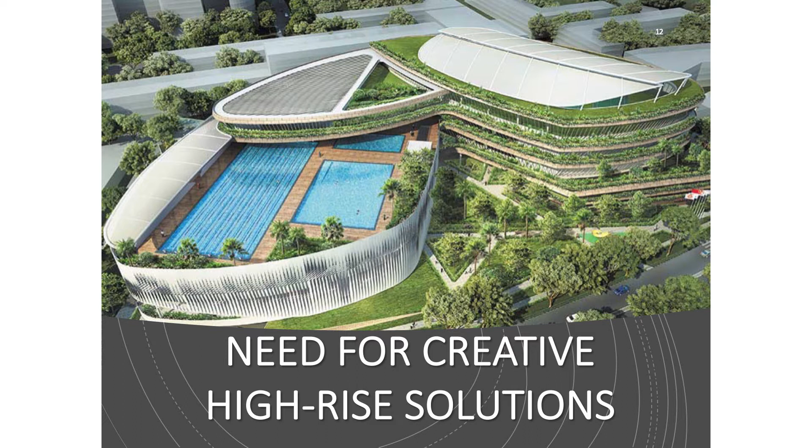Yet despite the land size, we have a population of about 5.6 million people. That population density translates to 20,000 persons per square mile, making us the second densest city in the world. So we have a need for creative high-rise solutions in where we work, live, and play, that also balances our land needs with preserving the natural environment.

A bit more about CPG Healthcare - this is the studio that I'm from. We have projects dating to the 1980s. Our mission is to design and deliver innovative, creative, and sustainable health-oriented developments. Our projects are quite diverse - we have a mix of public and private healthcare projects, medical academic projects, health promotion developments, and even wellness communities. We try to cover the broad spectrum of healthcare, targeting different phases of life, from primary care to palliative care.

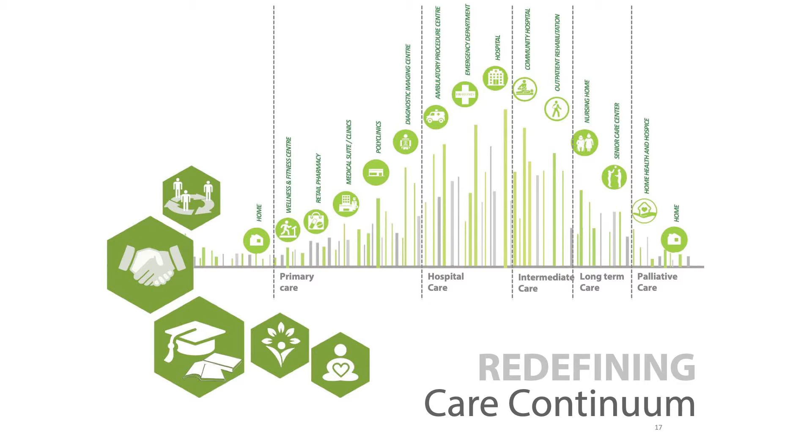We do this with 5 core strategies. The first is understanding the care model and the clients we work with, achieving sustainability through designs that are compact and accessible, integrating our projects into the community, and changing the perception of hospitals as places of disease. We seek innovative solutions through thoughtful collaboration with our clients, and look for salutogenic approaches that are people-centric. These 5 core strategies can be summed up in our biophilic design approach towards our projects.

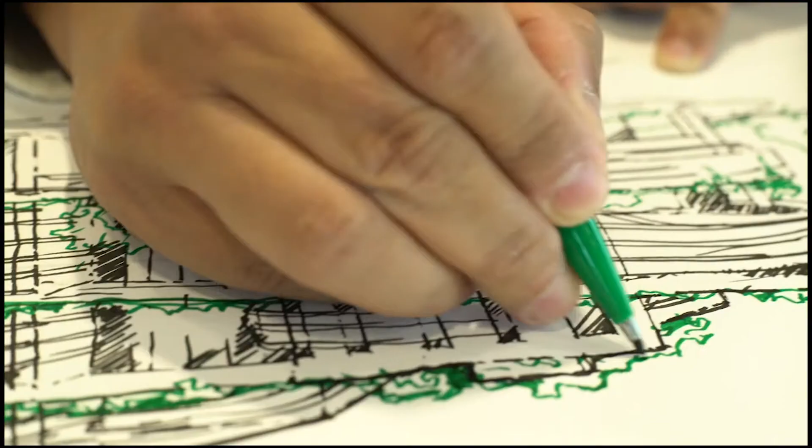This is a short video. Our job is to design more responsibly, to make a garden city a true work of nature.

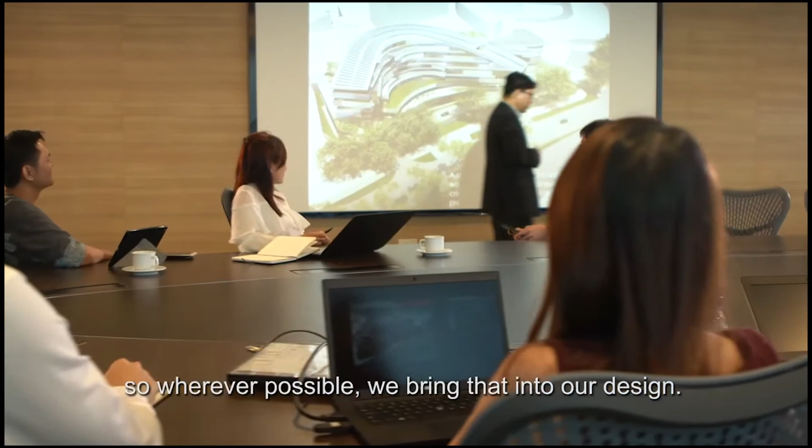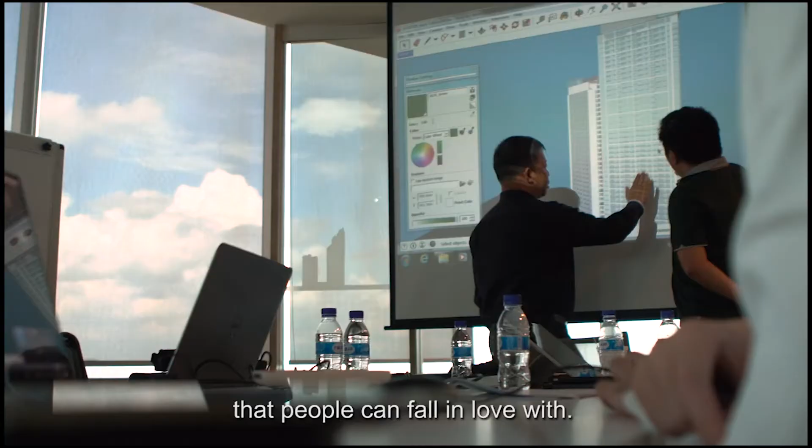We believe in biophilic design, so wherever possible we bring that into our design. Biophilic design is essentially how we use design to cultivate the love of living things. It's to highlight the beautiful aspects of nature that people can fall in love with. My role is to bring nature into the indoors so people are never quite detached from the outdoors. To me, it's a tool to see how you incorporate various natural elements into building design so as to create an environment of wellness.

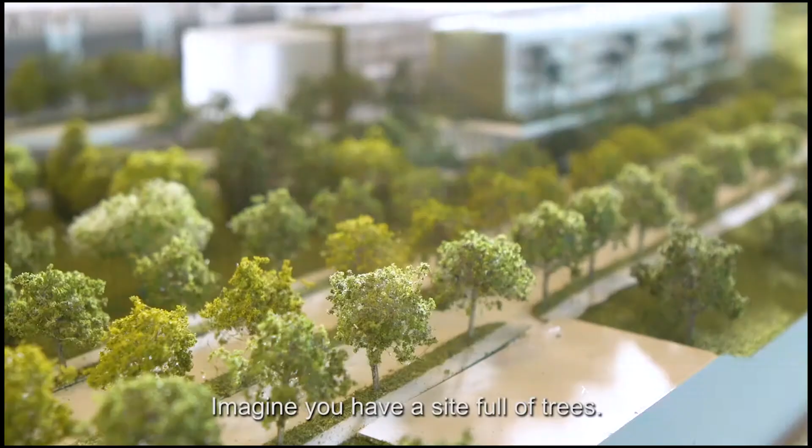The future of design is to think long-term, and the best way to do it, as one of the strategies, is to integrate with nature. Hence biophilic design is one of the best strategies out there. Imagine you have a site full of trees. If you add a building there without eliminating the trees, you bring in another aspect that was not originally there, while maintaining the memories and natural aspects of it.

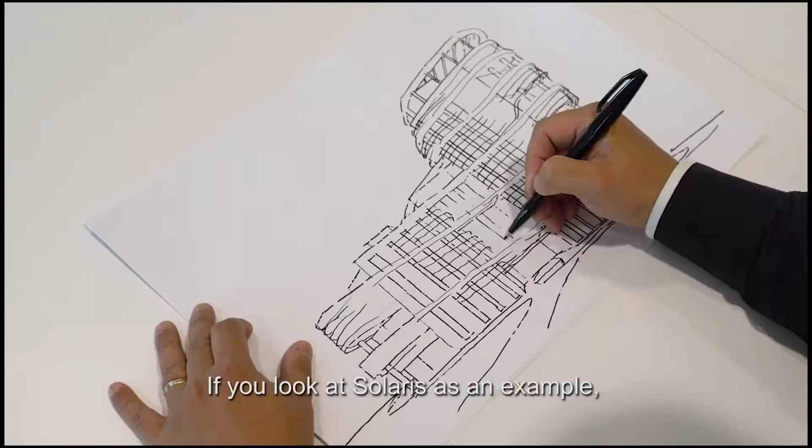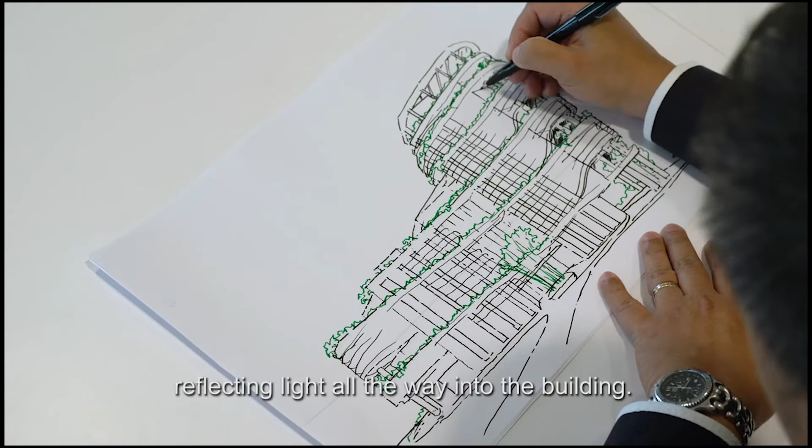Biophilic design does improve productivity, especially in the creative industry. If you look at Solaris as an example, it's surrounded by nature. It has an atrium that brings in natural light, so there are ample opportunities for workers to step out of the office or look out the window. What we have here are horizontal fins that also act as light shelves, reflecting light all the way into the building. By doing that, there's a lot of natural daylight coming in even without the lights on. That's a benefit of what biophilic design brings.

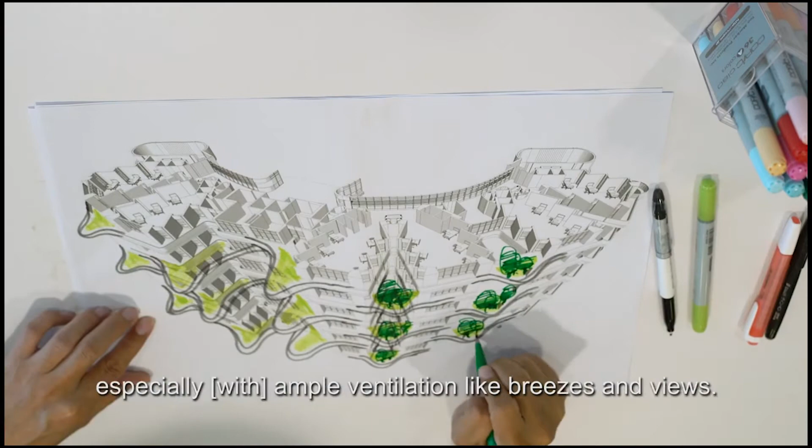Biophilic design does help improve the healing process, especially with ample ventilation like breezes and views. Natural light actually helps the body generate vitamin D, and psychologically it brings up the mood.

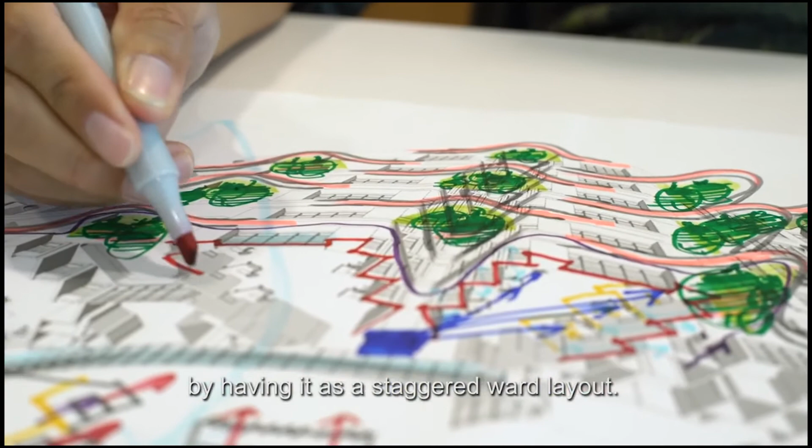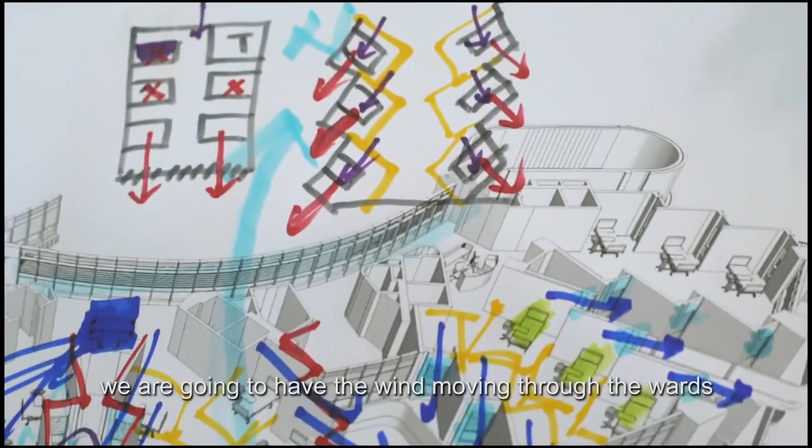When we designed this hospital, we thought, why can't every patient have a window? So we reinvented the ward layout, having it as a staggered ward layout so every patient now has a view towards a very nice, beautiful garden. In terms of ventilation, you can have wind moving through the wards because you have windows on both sides. When you have the view out, better ventilation, and greenery, it will actually aid in the healing process.

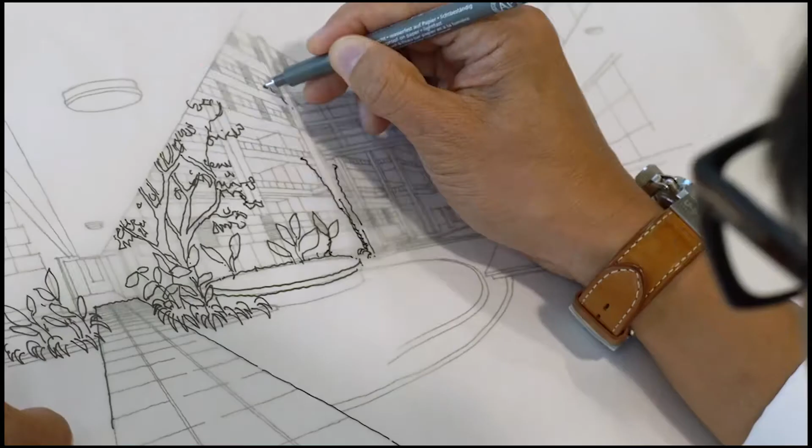In the education setting, biophilic design also plays an important role. When people, especially children, are stimulated by the environment, their spirits are lifted and attention is heightened.

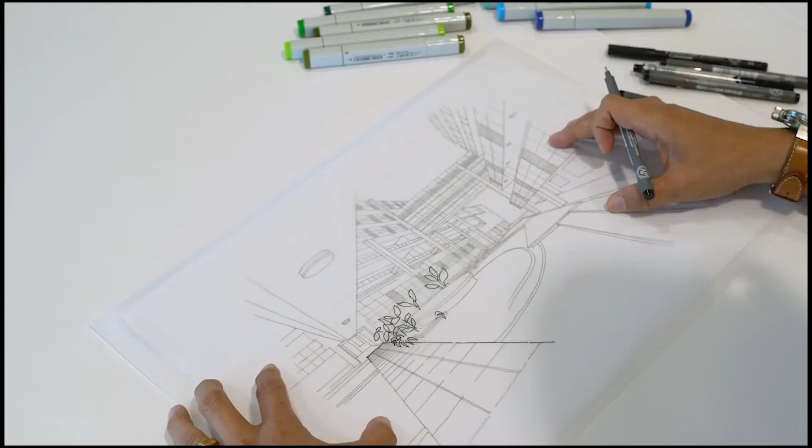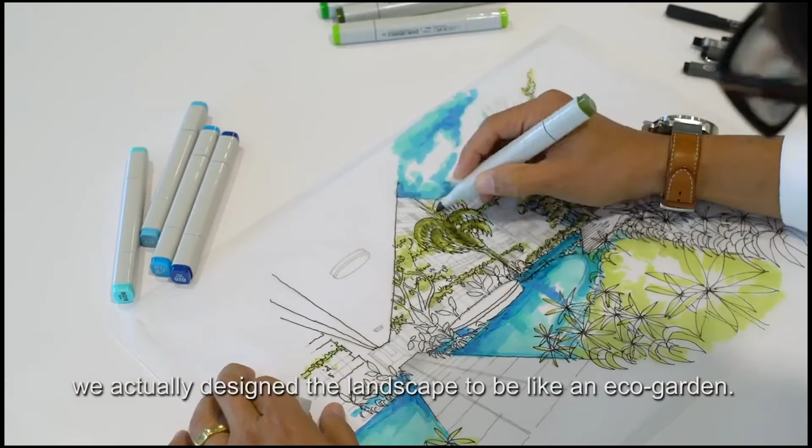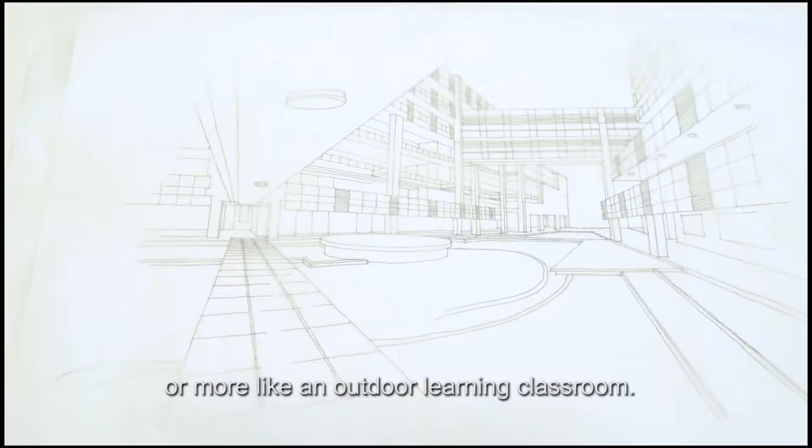This is actually a very special school to me: Victoria School. Instead of a conventional courtyard, we designed the landscape to be like an eco garden. We call it the eco street, and use it as a learning environment for the school itself. Students can immerse themselves and treat this as an outdoor science laboratory, or more like an outdoor learning classroom. By incorporating biophilic design into schools, the school itself becomes a tool for learning, an example of indoors and outdoors, and how it reacts to the environment.

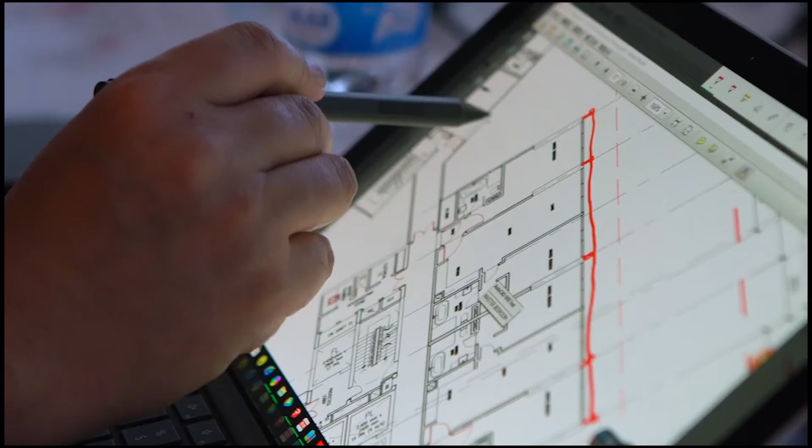Biophilic design to me is about really going back to the roots. We are really giving up a lot of our natural spaces, and the only way to reclaim that is to integrate it into the way we design our buildings. For Singapore, that is the way forward. Imagine if every development is integrated with nature, so every new development regenerates nature. That's the kind of future we hope we can contribute towards.

So I'm going to move forward into presenting our Singapore projects. The first one is the Khoo Teck Puat Hospital in Singapore. The key feature of this project was its integration with nature. The predecessor was Alexandra Hospital, a facility built in the colonial era, so most of the facility was low-level buildings, spread over 13.5 hectares of land.

The challenge for the new hospital was to take this previous hospital and squeeze it onto a site that was 1/3 its size, while retaining the garden concept of the original hospital. The clients wanted a hospital within a garden, aiming to alleviate stress and improve patients' rate of recovery, create an invigorating park-like environment for the general public, as well as a conducive working environment for the staff.

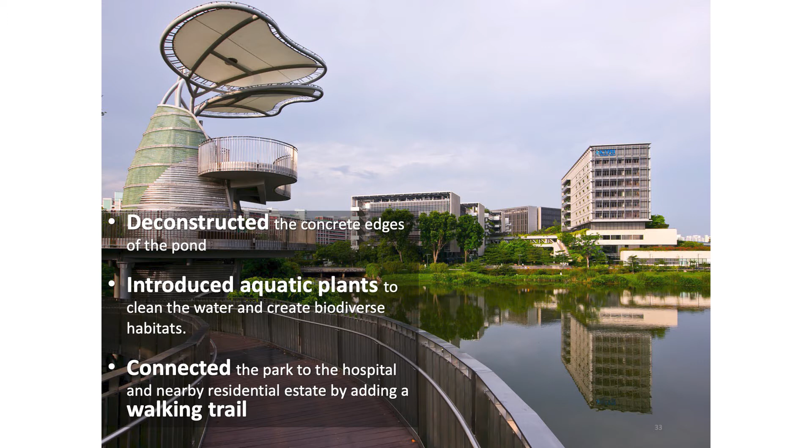With regards to addressing the local climate, we wanted to enhance the daylight, maximize natural ventilation, and reduce glare. We achieved this through orienting the ward towers to capture the north-south wind, as well as the usage of aluminum fins on the facade that enhance airflow by 20 to 30%. The outcome is that we reduced our reliance on mechanical ventilation by 60%.

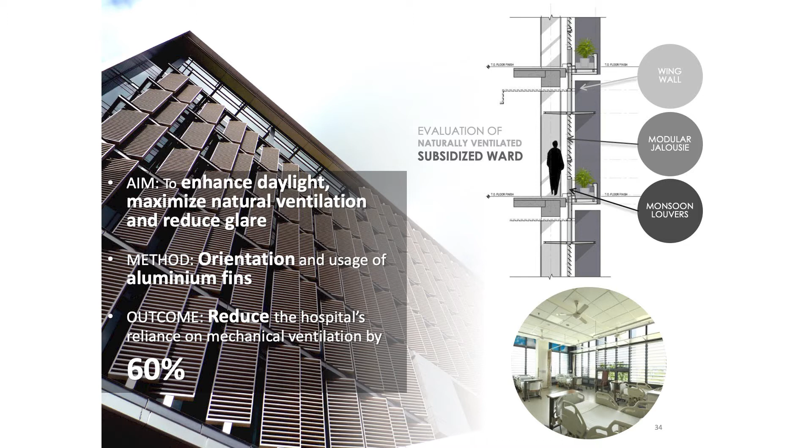So we conducted a post-occupancy survey with 200 participants. They were users like the staff, the patients, as well as visitors. We asked them if hospital design should invest in biophilic elements, and it was a resounding yes of 80%.

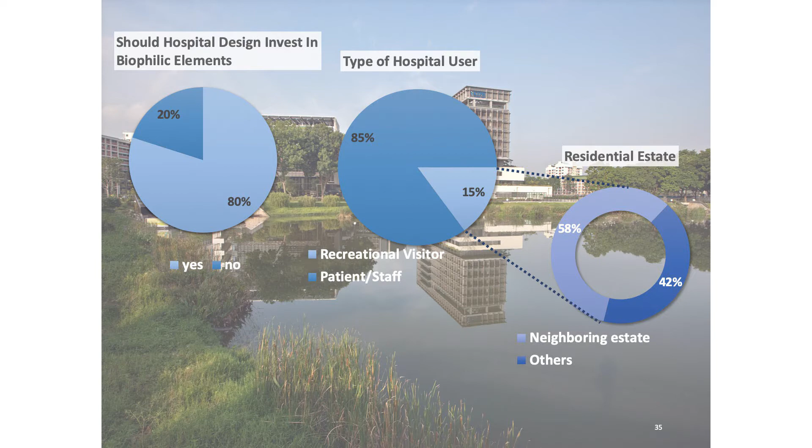We also found out from this survey that 15% of the users are actually recreational visitors. These are people who are coming to use the hospital, and their primary visit is not a healthcare visit. Out of this 15%, more than half of them are coming from the nearby estates.

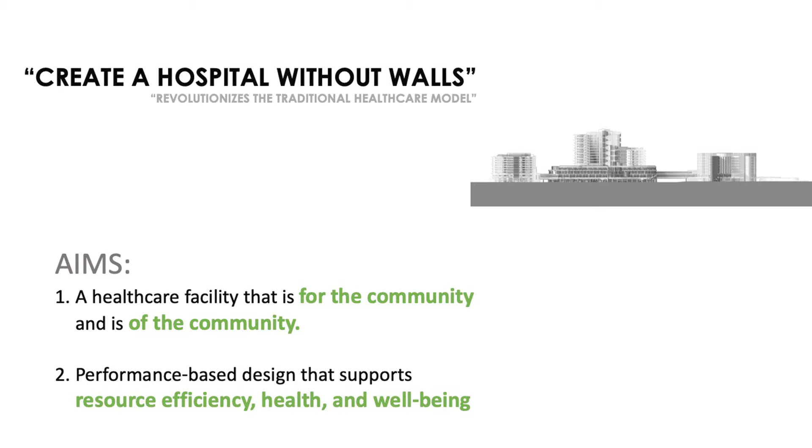Okay, so the next project I'm going to present is the Ng Teng Fong General Hospital. The key feature of this hospital is to create a hospital without walls. The aim was a facility that is for the community and of the community. We wanted a performance-based design that supports resource efficiency, health, and well-being.

So the gross floor area of this project is 184,000 square meters with a total of 1,100 beds. The hospital itself is divided into 3 buildings over a very sprawling urban landscape.

We have the Specialist Outpatient Clinic Tower, which is 8 stories of 16 clinics, located on the left. The one in the middle is the Regional Hospital, which is 16 floors in total. We have 4 floors dedicated to critical care, over 40 ICU units, as well as 18 operating theaters.

And then we have 12 floors of inpatient wards. The last hospital on the right is the community care hospital, it's step-down care, with 8 floors of inpatient wards.

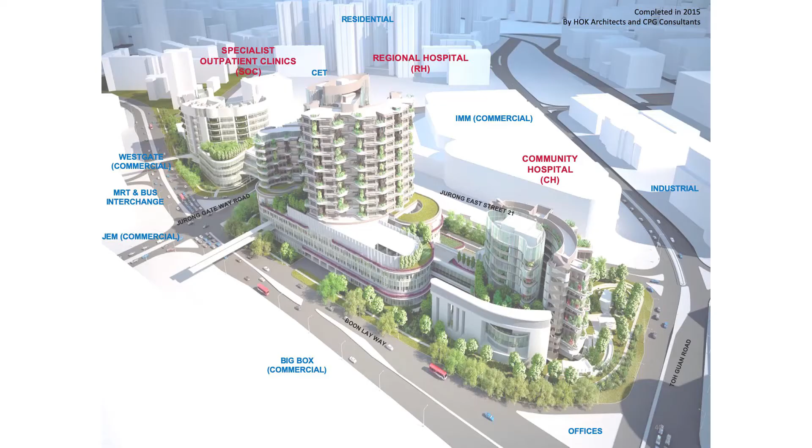This project was completed in 2015 with HOK Architects. As you can see on the site itself, it is surrounded by major roads, and in fact, the Specialist Outpatient Clinic is disconnected from the main site by one of the roads, the Jurong Gateway Road.

So to address this situation, we needed to create a public thoroughfare on the first floor above the ground level, which connected the hospital to its urban site.

So we wanted to link the retail malls and the train station to the hospital itself, providing users of the hospital and the community a safe passageway when moving through the space. It is linked through 5 main bridges, creating a very transparent, inclusive environment that embedded the hospital into the community, especially when moving from one shopping mall to another. You don't really notice that you are moving within hospital grounds. The walk score for this project is 86 out of 100.

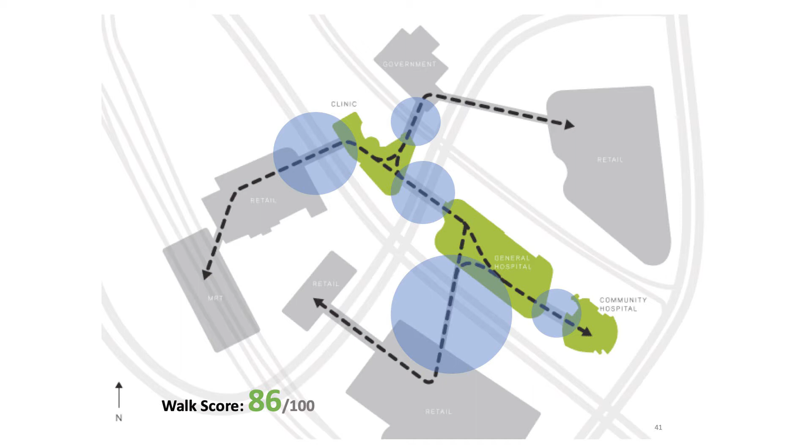What's interesting about this hospital is a typical example of inpatient ward design in Singapore. Because of land scarcity, we don't have the same luxury as American models with 1 or 2 beds per room. Typically, wards have about 6 to 8 beds in one bay, and because of the healthcare system, we need to be more cost efficient, so many wards are naturally ventilated. In the traditional design, you have a window on one end, so the daylight that penetrates the ward is really limited, and the view is really just for the person next to the window. This creates an environment with quite poor air circulation.

So what we wanted to do at Ng Teng Fong General Hospital was reinnovate this inpatient ward layout. We staggered the bed positions to create a fan-shaped floor plan, and by doing so we managed to achieve a window for every patient. Based on Roger Ulrich's study that windows with a view could positively influence a patient's recovery, we hoped that by giving a window to every patient in a ward hosting 4 to 6 beds, we could enhance patient comfort, enhance personal space, and give more space to healthcare workers around the beds.

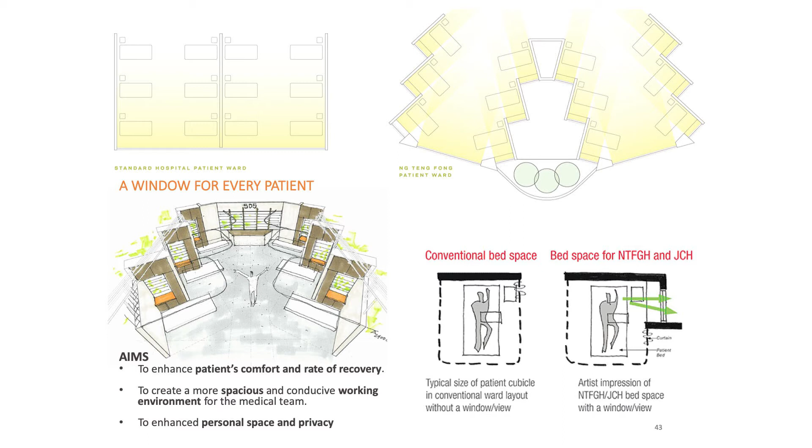The result of this fan-shaped plan is a ward that has very little reliance on additional electric lighting and very little reliance on air conditioning. The hospital also reported operational savings from shorter patient stays, better infection control, and staff retention.

Because the ward towers are like 12 stories or 8 stories, we introduced vertical planting along the building towers, giving patients direct views to nature from their beds. This provided additional shading for the patients, as well as reduction in noise pollution from the traffic outside.

To optimize the design of the inpatient wards, we conducted CFD modeling as well as climate analysis, acoustic analysis, and daylighting analysis to really optimize the way the wards were designed. For example, for daylighting aspects, we have projecting slabs, light shelves, and skylights, ensuring all our wards have a daylighting factor of more than 2.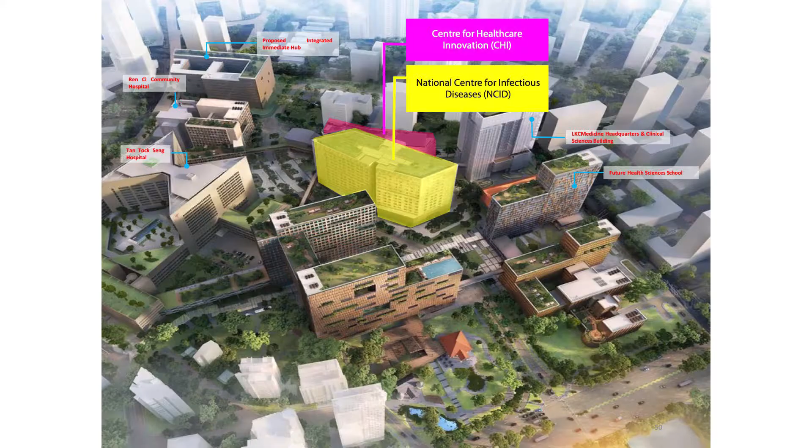Okay, so now I'm going to go through a very quick collection of our different Singapore projects. This one is the National Centre for Infectious Diseases. It is located within an existing health hub, so we have the general hospital, a community hospital, a health science building, and a future medical school on site. The need for this hospital is quite unique in that we wanted to limit exposure to the public while still having a controlled integration between these different medical facilities.

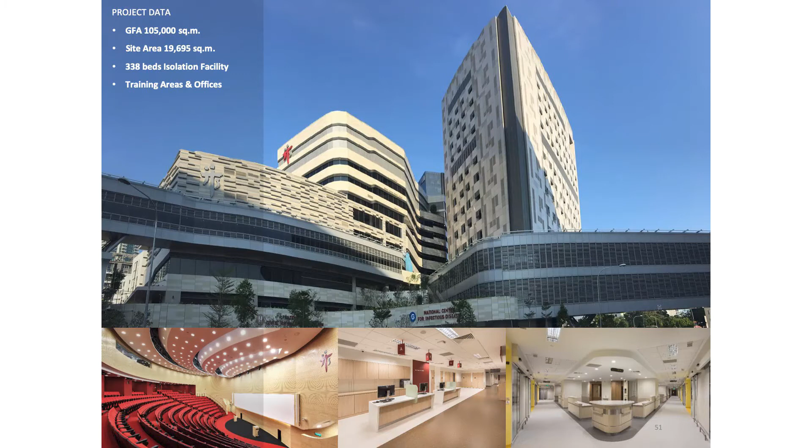The project itself is 105,000 square meters and has 338 beds. The core clinical facilities include an inpatient ward, screening areas, diagnostics, and research labs. We identified that working in a center for infectious diseases would probably place higher levels of stress on the healthcare workers in these facilities, so we wanted to give them a breakout space where they could go and relax and enjoy sensorial therapy, while limiting exposure to the public.

So what we did was internalize a lot of the biophilic design in this hospital. We have rooftop gardens with breakaway areas for the staff, as well as internalized courtyards.

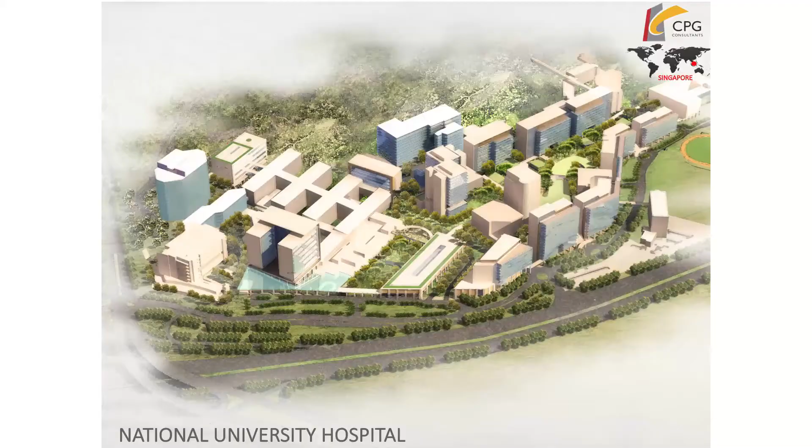Another example that we have is the National University Hospital. This is an example of integration between healthcare and education, as the School of Medicine is on site. Another project that we did was the Ministry of Health headquarters in Singapore.

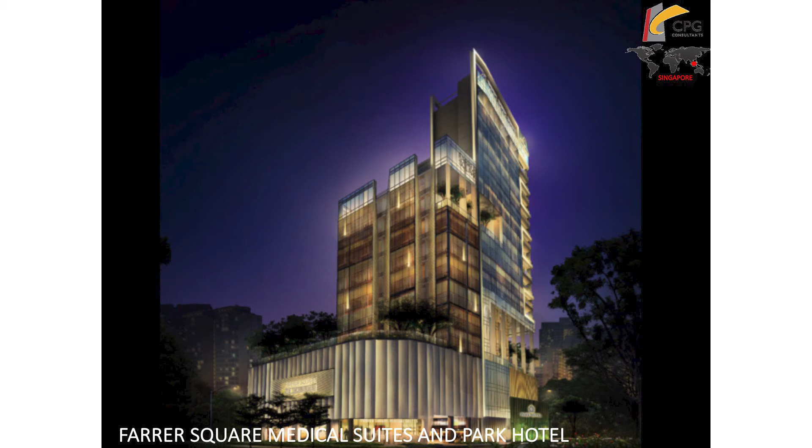And this one's quite interesting, the Farrer Square Medical Suites and Park Hotel. Singapore is actually a very popular destination for medical tourism. We attract a lot of wealthier clients from Indonesia, India, and the Middle East to come here seeking our services. Those that use this facility are usually there for extended stays and expect a higher level of comfort, so this hospital is modeled after a hospitality suite. In that sense, it's very much a hotel.

And lastly, we also have Gardens by the Bay, which you might see in the movie Crazy Rich Asians. It is a government initiative to transform Singapore into a city in a garden. So we moved from a hospital in a garden to now the whole city is in the garden. It plays a very integral role for Singaporeans, providing an urban oasis where they can unplug from the fast pace of life.

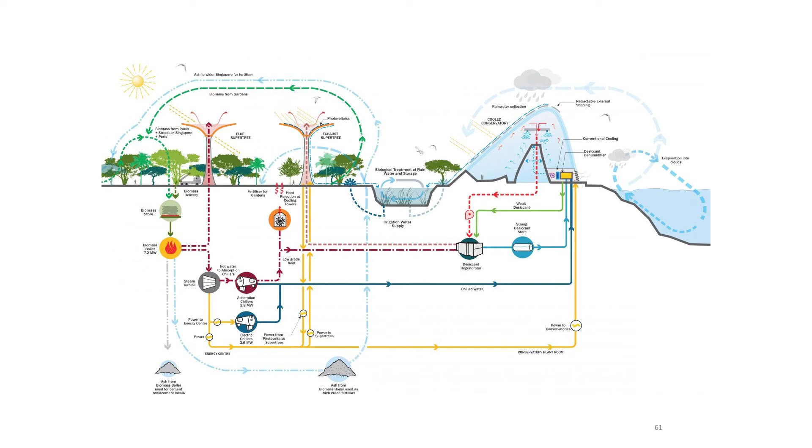And the super trees, while they are very iconic showcases of form, actually play a very functional role in the entire park. They help with the circulation of water, as well as collecting energy from solar panels and moving it back into the glass greenhouses located in the park. So you see here, it's really a transition from the past, where we had architecture with landscape elements, to...

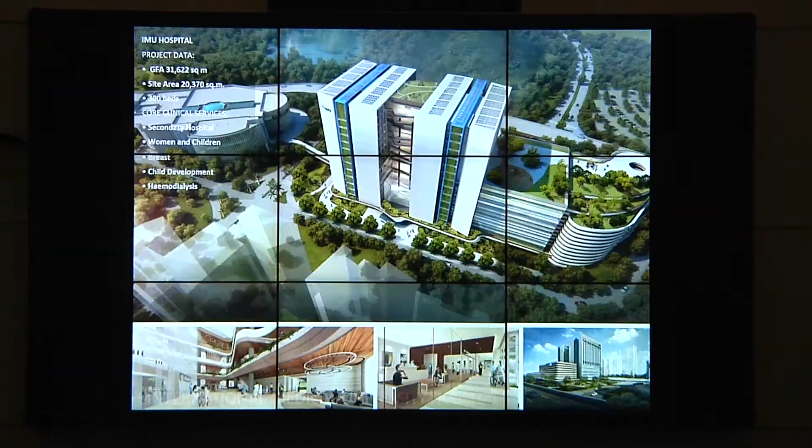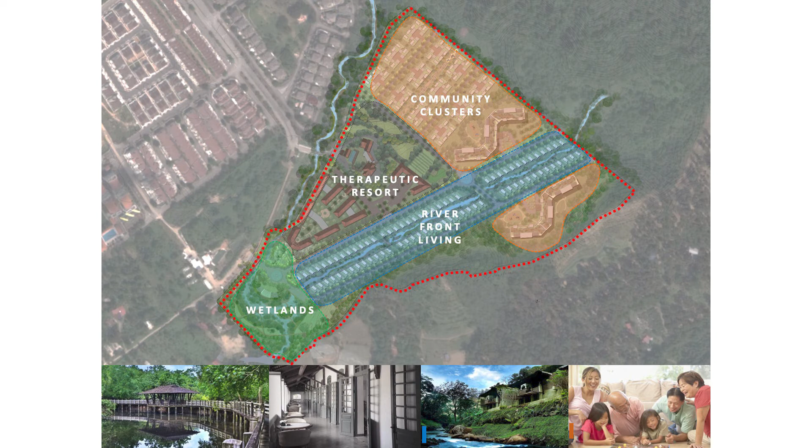We have a few projects in Malaysia. This is an academic hospital, and this is a women and children's hospital in Malaysia as well. This is an example of a retirement resort master plan in which we designed riverfront living that evoked a rustic sense of the older Malay villages for the residents, so that they develop a sense of familiarity with the grounds. This is some of our projects in China.

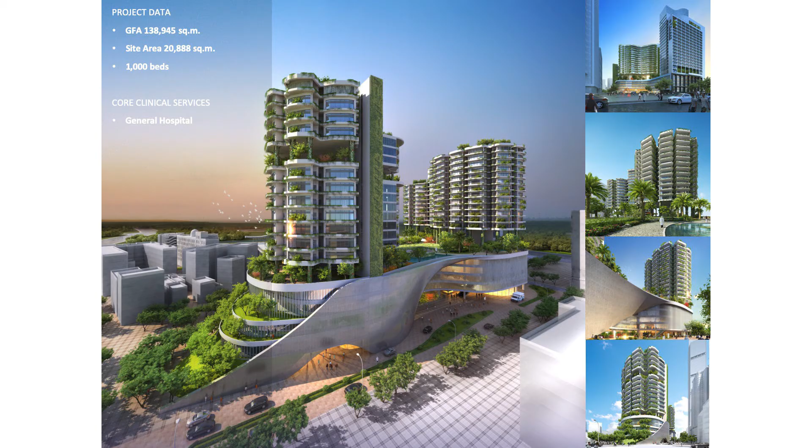We did the 4th People's Hospital of Shenzhen, which is modeled after the Ng Teng Fong General Hospital. And here we are recreating that vertical landscaping with direct views to nature from the patient's bed.

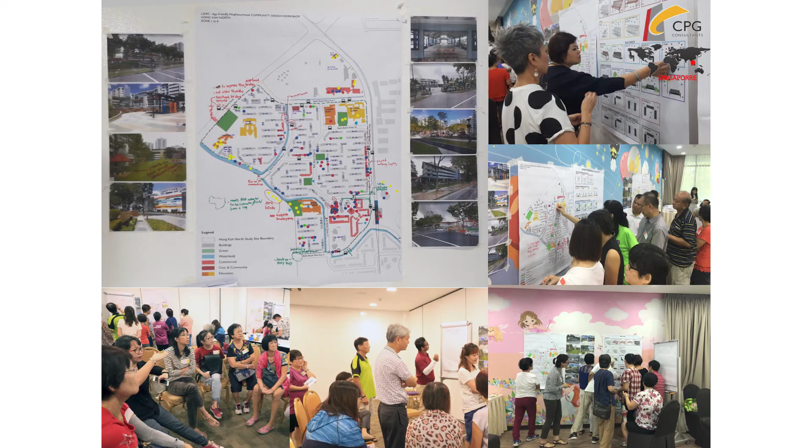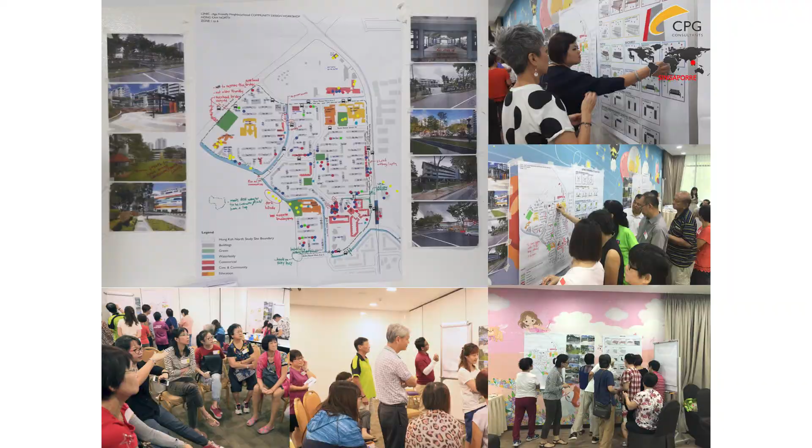Finally, I'd like to say that many of our most innovative projects actually come from the rigorous conversations, discussions, and focus groups that we have with our various stakeholders. This includes the developers, the doctors and nurses, and the engineers, and most importantly, the end users. This process of conversation provides us a lot of insightful, rich information that constantly challenges us as a design team to improve and evaluate our projects and create the award-winning architecture that we have today.